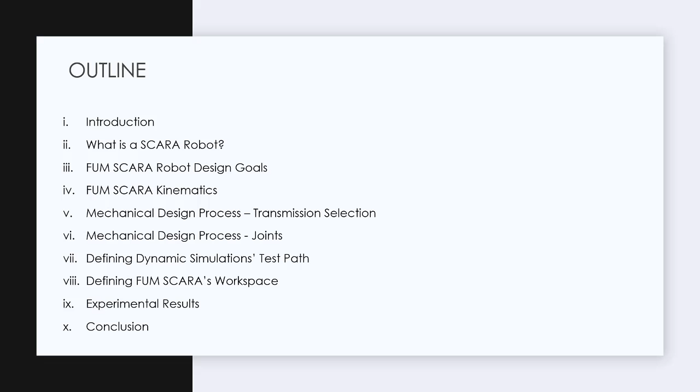This outline represents the path that will be taken during the presentation. After introducing the paper and outlining what a SCARA robot is, we will move through the robot's creation process, discussing the project design goals, the kinematics behind the robot, and the design process that outlined its creation. After that, the testing of the robot, along with experimental results, will be covered, followed by a conclusion.

Robotic manipulators have become a large part of the world today. As we work to automate the manufacturing industry, among others, the wide range of application for these machines has been highly sought after. Research on robot design includes topics such as nonlinear direct power transmission, which moves motors from joints to the base of the robot to decrease the effect of weight on the robot's dynamics, and vibration control in SCARA robots, or how the elasticity of harmonic drives affects the vibration of a SCARA robot in use.

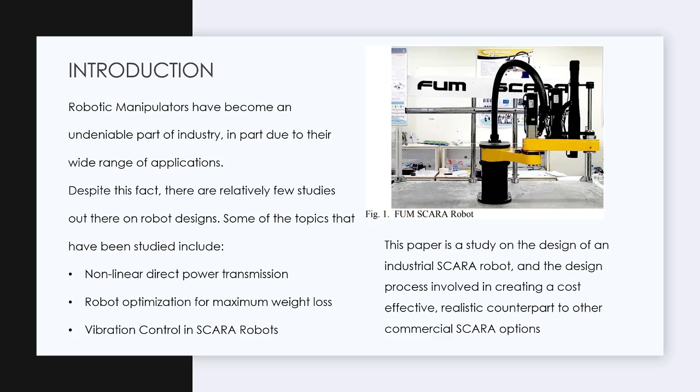This paper is a study on the design of an industrial SCARA robot with a focus on cost effectiveness and keeping in competition with commercial SCARA counterparts. What is a SCARA robot? SCARA stands for Selective Compliance Articulated Robot Arm. The selective compliance section of that refers to the fact that it is compliant in the XY axis and rigid in the Z axis. The articulated robot arm part signifies the strength of this robot, which is what it's used for: small assembly applications. Due to its high accuracy and repeatability, the SCARA is a popular choice for commercial applications.

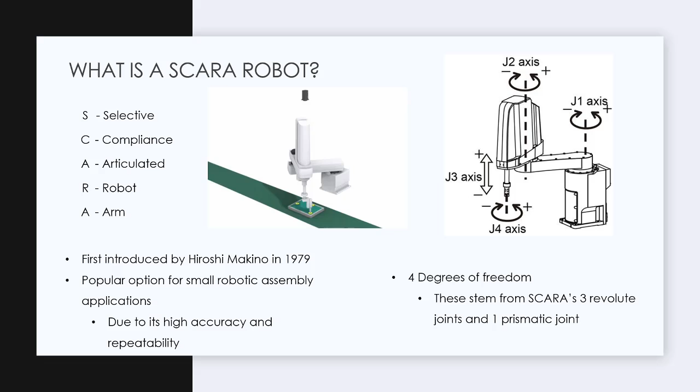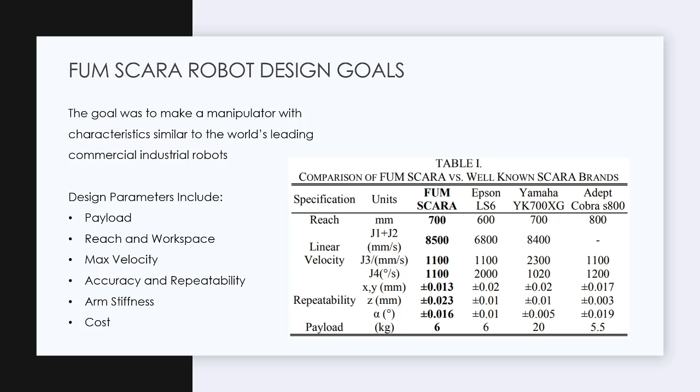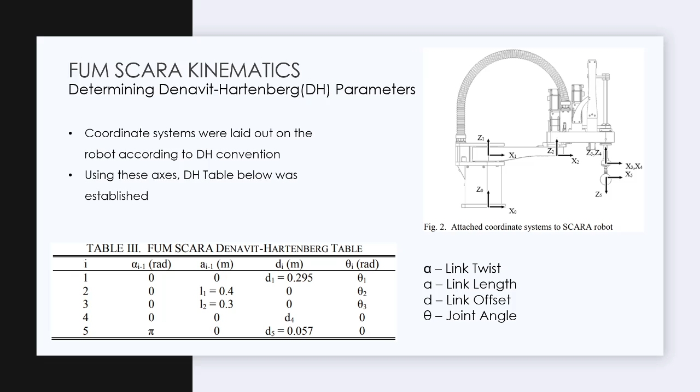Determining the Denavit-Hartenberg parameters is the first step to finding the kinematics of a robot. By using the DH convention, coordinate systems were laid out on the robot, which is shown in Figure 2. After that, by looking at the relationship between each coordinate system, the DH table for the FUM SCARA was established in Table 3. The DH table describes kinematics using the variables labeled in the bottom right.

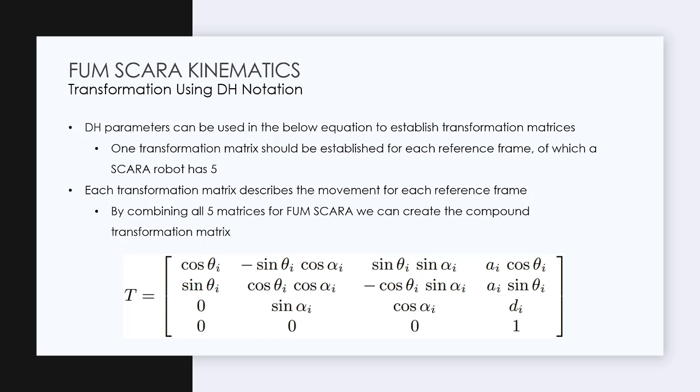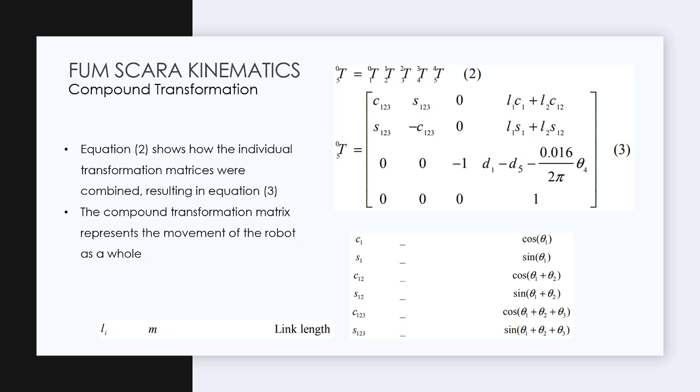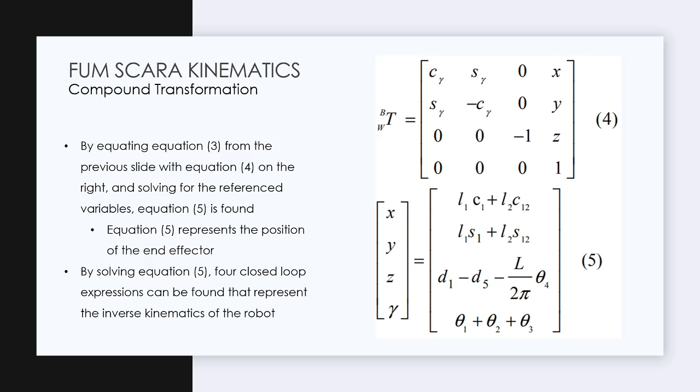The Jacobian is a link between the joint velocity, in this case theta dot, and end effector velocity, which is typically x dot, or in this case v for velocity. In equation 6, you can see that link represented. Using equation 6 and the previous equations, equation 7 can be derived to represent the Jacobian of the robot.

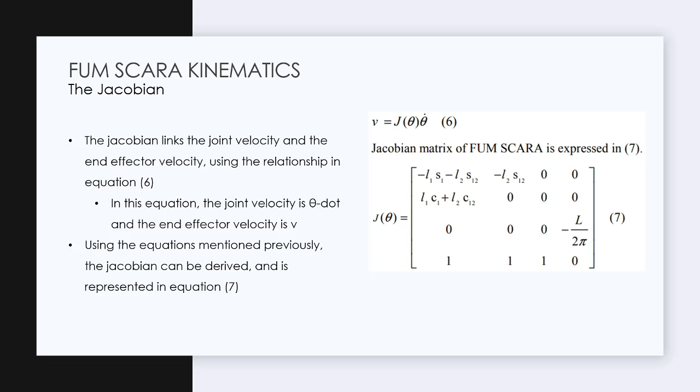To start the mechanical design process of the robot, the first stage was the selection of the motor and the gearbox, otherwise known as the transmission system.

The goal for this system was to transfer power into machine movement effectively. In Figure 3, the process used to arrive at a transmission system is outlined in a flowchart. After estimating variables such as link weight and link length in initial concept design, different transmission systems were tested on a critical trajectory. The critical trajectory was designed to expose the machine to the maximum velocity and acceleration it would experience, and the system was tested on this trajectory to ensure the robot could handle prolonged or heavy usage.

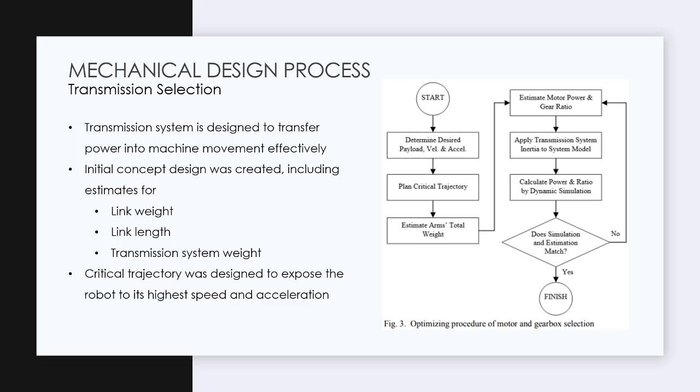After several iterations, the test simulation that best matched the calculated results was chosen and implemented. After selecting a transmission system, the next step was joint design. For the first joint, which attaches the first link to the machine base, there was a heavy focus on not exposing the gearbox shaft or any part of the transmission system to any bending moments. This was accomplished by inserting supports on both sides of the link to support it evenly without the help of the gearbox. This can be seen in Figure 4. In this design, the motor torque transmits to the first link through the use of a power lock instead of traditional methods.

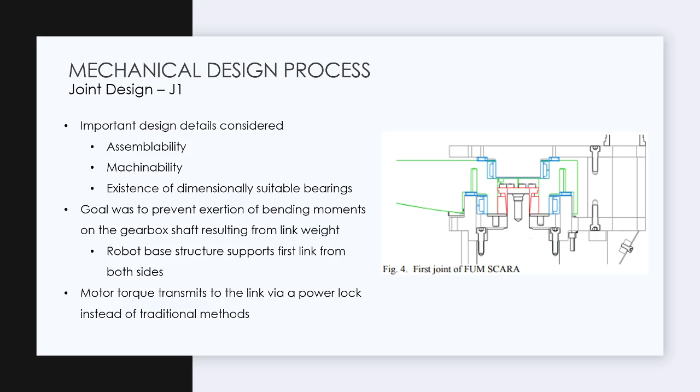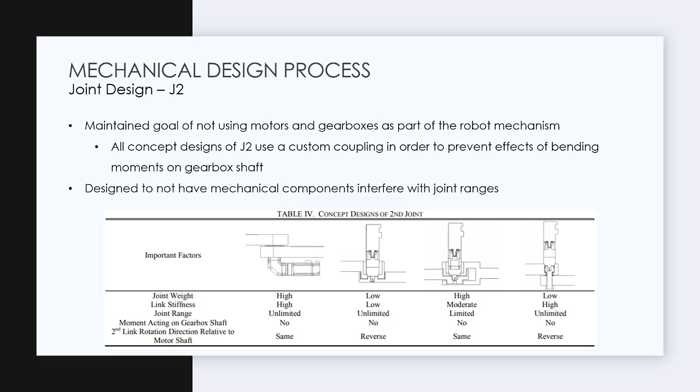For the second joint, between the two links, the same major focus existed. It was not to expose the transmission system to any bending moments. A number of concept designs for the second joint were drawn up and can be seen in Table 4 below. Critical design elements such as joint weight and link stiffness were considered, but perhaps most importantly, the joint range was valued highly. Ultimately, the joint option farthest to the right was chosen for its low joint weight and high link stiffness while maintaining an unlimited joint range.

For joints 3 and 4, they're located right next to each other, since they both control the end effector, just in different ways. J3 and J4 control the linear and rotational movement of the end effector, respectively. One important aspect of the joint design in the FUM SCARA is the use of a ball screw and a ball spline as opposed to a traditional rotary ball spline. While these both accomplish the same thing in the end, a rotary ball spline translates both linear and rotational motion at the same time, while a ball spline combined with a ball screw will translate linear motion through the spline separately from the rotational motion which gets translated through the screw.

What this means on the production end is a reduced joint size and a more complicated design using two parts for what could be accomplished with one. The big takeaway from a design perspective, however, is the reduction in cost that this choice brings to the table. You can see the contrast between these two systems in Figure 5, where the FUM SCARA uses a combination of a ball screw and a ball spline, whereas the Epson LS SCARA uses a special ordered rotary ball spline.

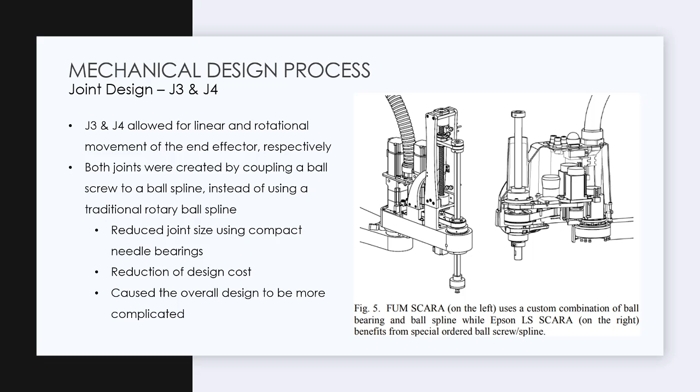If you recall, in the simulations of the FUM SCARA, when determining the transmission system, a critical trajectory was simulated. As you can see in Figure 6, this is what it looked like. The design of the trajectory takes the robot from one corner of its workspace to the other, and the highest forces are exerted on it when the two links are collinear, which is right in the center of Figure 6. MATLAB software was used to simulate the effects of the trajectory, so when the links are collinear, this is when each link reaches both its maximum velocity and its maximum acceleration. In addition, due to the center of gravity of each link being the farthest away from the base at that time, the machine also experiences its strongest lateral forces during that moment.

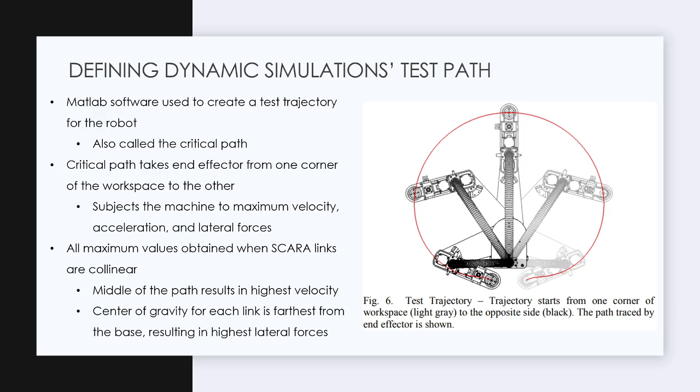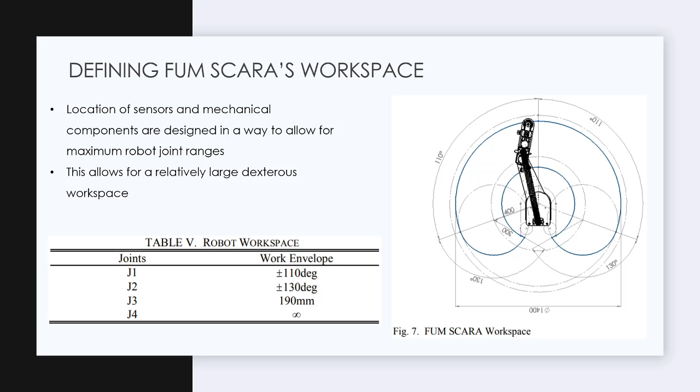During joint design, one of the primary goals was to have the joint ranges be limited as little as possible by the location of other mechanical components and the joint design itself. Figure 7 is an illustration of the FUM SCARA workspace from a top-down perspective, and its limits are described in Table 5 as well. This design results in a very competitive reach for the links and a very strong workspace.

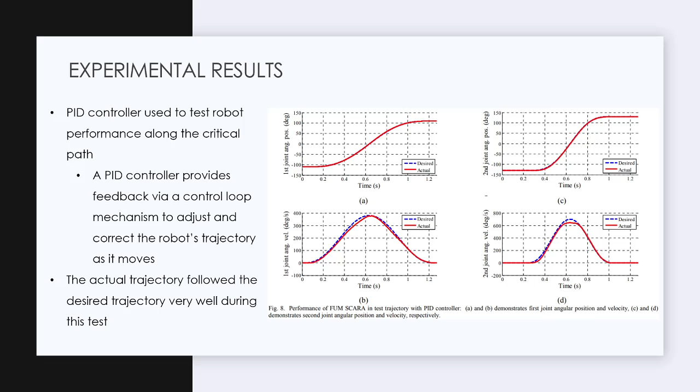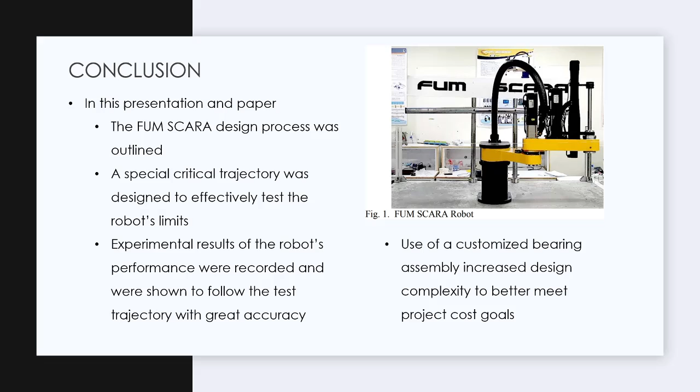In this paper, the FUM SCARA design process was outlined, including its transmission selection and its joint design. A critical trajectory was designed and simulated in MATLAB to expose the robot to its critical forces and maximum realistic limits. Experimental results were recorded and were shown to follow the simulated critical path with great accuracy, and the use of a customized bearing assembly increased design complexity to better meet project cost goals.